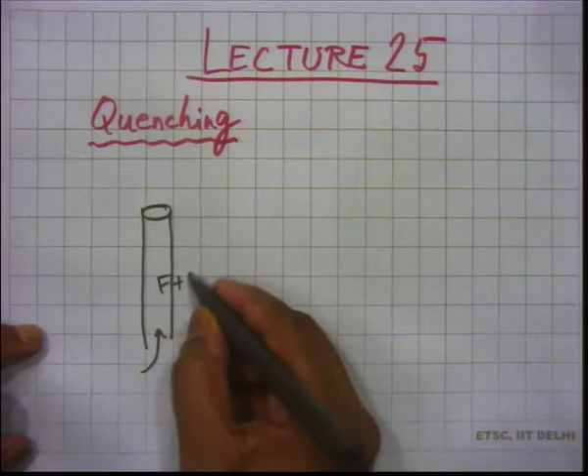Quenching is extinguishment of flames, and the way quenching is studied is you can take a tube, for example, and flow a fuel air mixture through it to get a flame. Then if you suddenly stop the reactant flow rate, you would expect to see the flame come back.

That is called flashback - the flame moving back inside the tube. The reason we can study quenching like this is that if you take tubes of different diameters, for some tubes the flame which flashes back will not be able to propagate all the way down.

It will propagate some distance maybe, but then it would get extinguished. So that is called quenching.

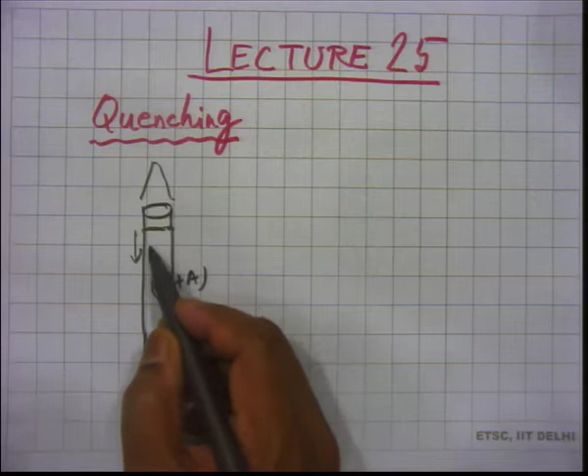Extinguished means the reactions in the flame will become very low and stopped, and you will not see a visual flame. If your tube is transparent, you will see the glow of the flame, the visual flame zone, going off - we have already seen that in one of the videos in a previous lecture.

In that experiment recorded on video, tubes of different diameters were used, a fuel air mixture was flown through the tube, and then the flow was suddenly turned off, and then you see the flame coming back.

In some cases the flame could come back and propagate all the way down. In some other cases the flame did not propagate all the way down. So there was a situation when the flame got extinguished midway, and that we call quenching.

Now, if you remember the video again, you will recollect that in those situations where the tube diameter was small, when the tube was narrow, the flame was not able to propagate all the way down.

So the first thing we seem to understand from that video is that the flame traveling in the tube has the fuel air mixture, because you are flowing it and then suddenly stop it. Even though we stop it, it still has the mixture in it.

It still has the mixture in it, but the mixture is not moving out so much because you have stopped the flow. So you have a tube filled with a fuel air mixture, and the flame has the possibility of moving down.

It was not moving down when the flow was taking place, because in that case the flame was getting its feed of the fuel air mixture, but you suddenly stopped it. Now the flame has this opportunity to travel back.

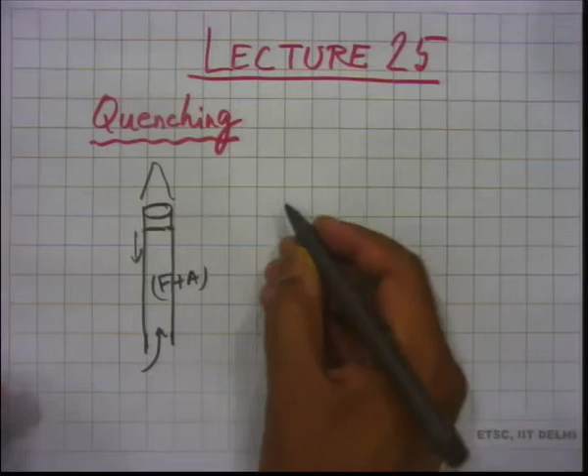Because it is getting more resistance and more in contact with the walls. So the response here is that in a narrower tube there is more contact with the walls, and the way to quantify that is to calculate an area by volume ratio of the flame.

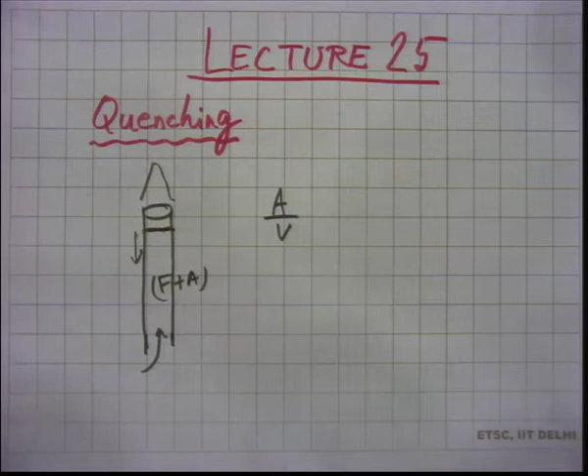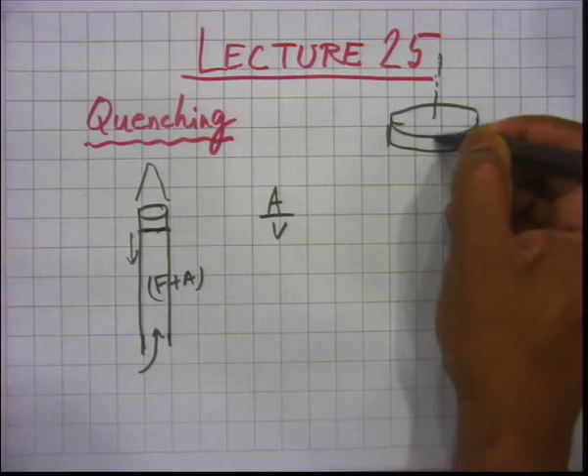So the flame which I have drawn here, if you think about it in more detail, it is like a disc. This is the axis of the tube, so this is the tube, and this is the flame which is trying to propagate. So it is like a disc, we can say, approximately. Nothing is actually like a flat smooth surface in a flame - we remember the videos, it does seem to get distorted, not exactly planar. But we have to simplify things, we cannot take all complications into account, so we take this as a disc.

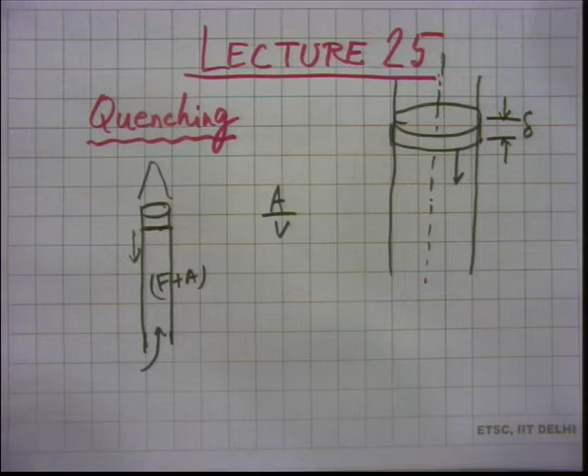Now, you can tell me how much is this - delta. So this is the thickness of the flame. We are using the same notation as we used for laminar burning velocity and flame thickness derivation of expressions. So this is delta, and if we call this tube diameter as d, then the area by volume is what?

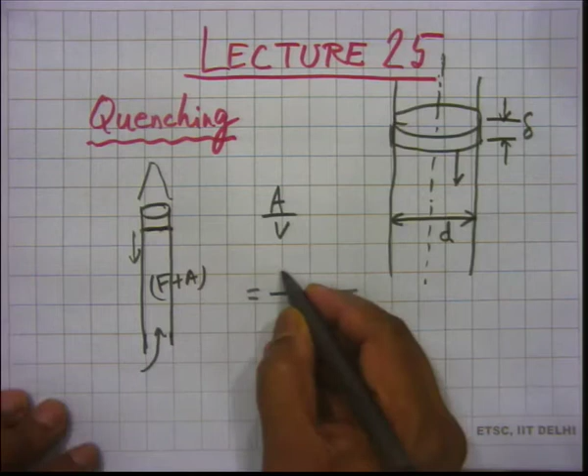Area is pi d into delta. Which area are we talking about? Contact area. So that should be pi d into delta, and the volume should be pi d squared by 4 into delta - volume of the flame. So the deltas get cancelled out, the pi's get cancelled out, one of the d's will disappear. So this will be 4 by d.

So area by volume is actually 4 by d, which tells you something you must have guessed even before we got this expression here - that if you have a smaller diameter tube, then the area by volume ratio, the contact area divided by volume ratio, is actually going up. If it goes up, then the heat losses in a relative sense will be stronger than the heat that is generated in the flame, than the thermal energy released in the flame. In some sense it will be stronger. So that is the whole idea.

So in that context we can understand something about quenching, but we want to go further and also derive an expression for what is known as a quenching distance. The d that I have marked here, this can be called a quenching distance - for a tube, it is that diameter of the tube below which a flame will not be able to propagate. More than that, the flame will be able to propagate. So that is called a quenching distance.

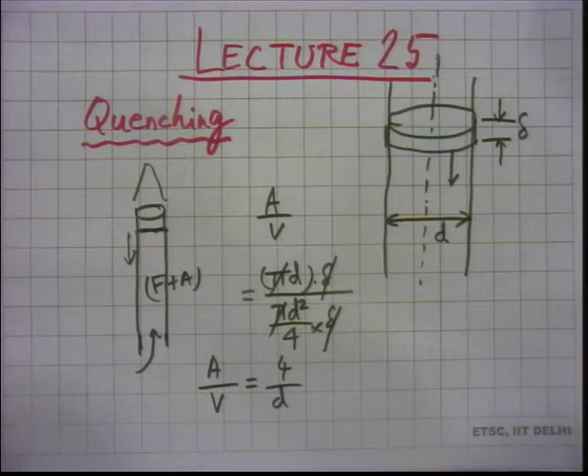So there are quenching distances for tubes, but there are also quenching distances for slots. Suppose you have a slot kind of burner, that means a rectangular cross section, maybe with a high aspect ratio, and through that there is a mixture flowing, and then you have a flame established on the top of that slot. You stop the flow of the fuel air mixture - suddenly will the flame come back, or will it get quenched? So it is a similar question.

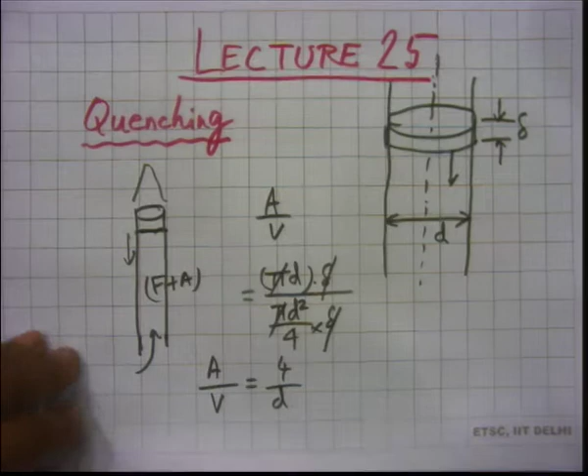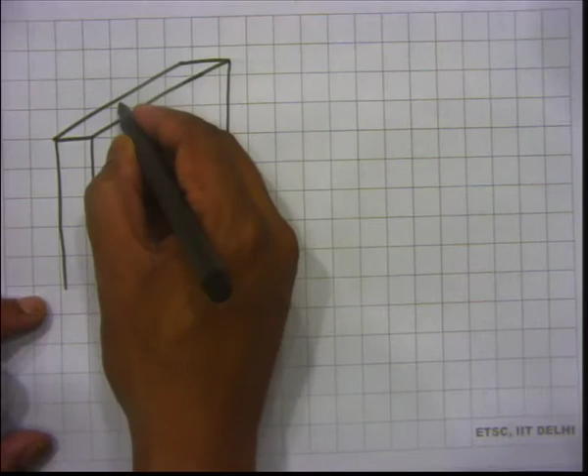Similar to the circular tube situation, but you have this other situation when you have a rectangular slot, and if you have this, then this distance is d, and this is called a quenching distance. So typically we call a quenching distance even for a tube, even though it is actually that diameter. So here we call it the quenching distance.

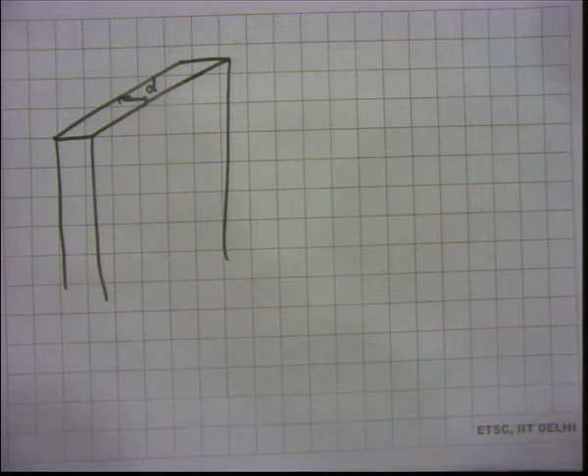The same thing applies here. If you have a slot burner where this width, this distance d, is smaller, then the flame is likely to get extinguished. You can think of a flame and calculate an area by volume ratio, and it's easy to see that if this distance is smaller, the area by volume ratio is larger.

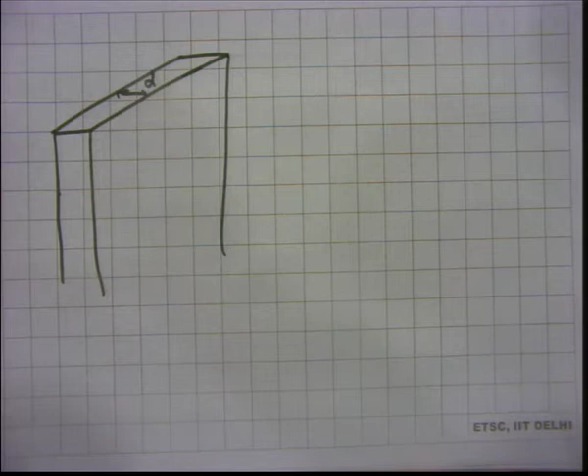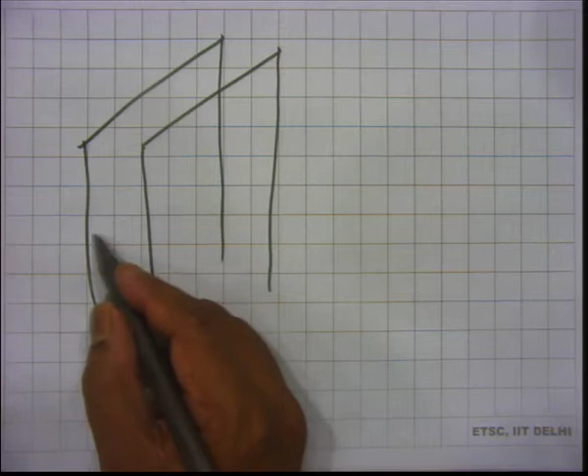Now, we will not even do this slot burner, we will just do a derivation where we have two plates like this. It is open on one side, open on this side, and open on the back side, and it is just two plates, long plates. If they are long, then they can contain a mixture.

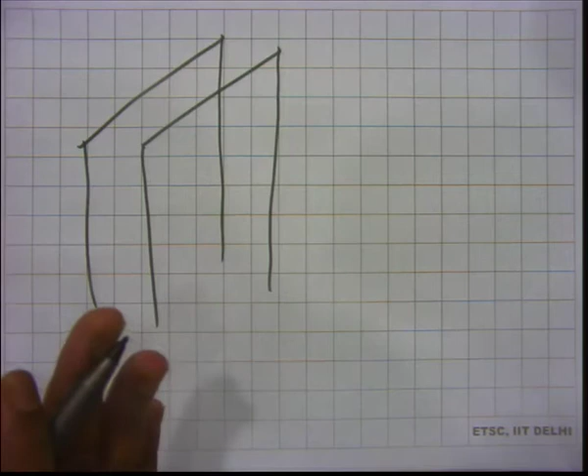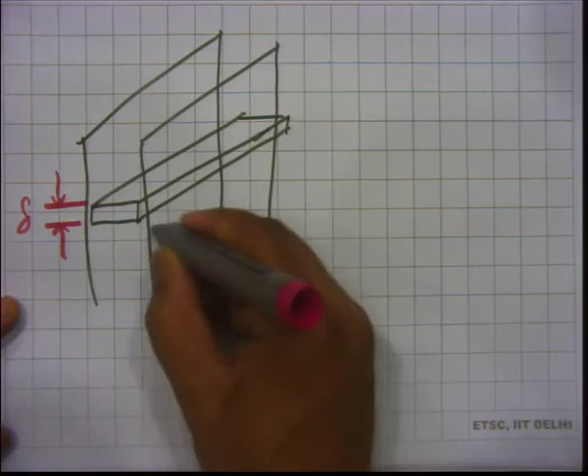So you have this flame here which I am drawing like this, and this again will be delta. We will call this L, and we will call this D. D is the spacing between the two large plates.

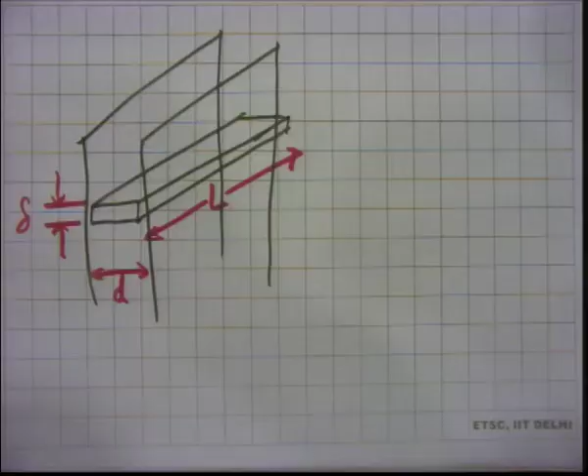The objective of the analysis we are going to do is to get an expression for D in terms of something else, in terms of the properties of the mixture. D is this spacing between the plates where it gets extinguished. We want to determine the limiting value of D for which quenching happens for the first time.

What do I mean by first time? Imagine having these two plates, and to start with you consider a configuration where the plates are far apart, with a fuel air mixture between them. If you ignite, you expect the flame to go through because the distance appears large, and then you reduce it, and keep reducing it. At one point it will not be able to propagate, that is when we call it a quenching distance. Smaller than that it will of course quench the flame.

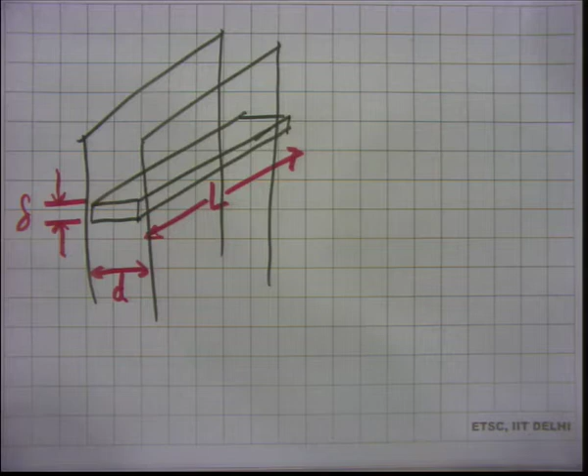So here we are not going to stop the flow. In this example we are just thinking of a situation where you have these two plates and between them a fuel air mixture. It is similar to a situation where you have these two plates, a flow going through them, and then you suddenly stop the flow. So then you have a fuel air mixture which is not flowing and the flame is propagating. We are thinking of that situation.

As we are decreasing the distance, at different distances we are also stopping that flow and then finding out what happens. These are all different experiments. First experiment: large distance, fuel air mixture between the two plates, not flowing. How do you imagine a fuel air mixture not flowing? You first think there was a fuel air mixture that was flowing, then you stop the flow, and now the flame starts coming back and your observation time starts from there.

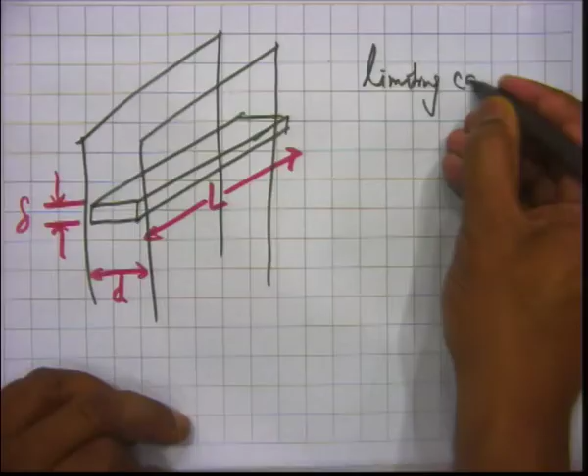Second experiment: you reduce the distance between the plates by some amount and do the same experiment. Third experiment: reduce the distance again by another amount and repeat. We keep doing that until the flame gets quenched. Once you get quenching, further experiments with smaller distances will also result in quenching. So we are talking about a limiting case, and we want to do an analysis.

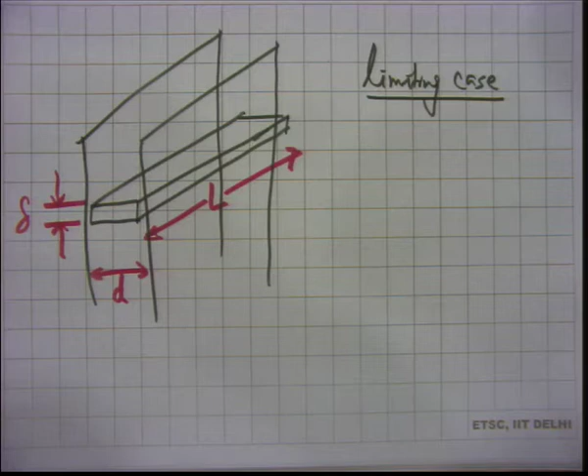The question that was asked was, what is the purpose of this objective? We want to get this D, the limiting value of D, which is the quenching distance, in terms of a few things, in terms of the mixture properties or laminar burning velocity or something.

If you have two plates and a fuel air mixture, then D cannot be just one number, one universal value for all kinds of fuel air mixtures. That's not possible. Even for a given fuel, the equivalence ratio of that fuel air mixture matters. Suppose you are considering only propane, the propane air mixture equivalence ratio will determine the value of D, isn't it?

A stoichiometric mixture will have some value of quenching distance. If it is not stoichiometric, it will have some other value of quenching distance. If you change the fuel, then the quenching distance will also change.

So D depends on a few things, right? D depends on the fuel type, depends on the equivalence ratio, maybe some other properties of the mixture, which we'll have to see. So we want to get an expression for this.

Now, the analysis that we are going to do is for this limiting case, when you get quenching for the first time. But the analysis will be good in the sense that it will tell us something about D, what mixture properties D will depend on. It's a simple analysis because we are just looking at a situation where the limiting condition has been met. The limiting condition must be that the heat generation and the heat loss are becoming equal. So there is this thing going on for the flame.

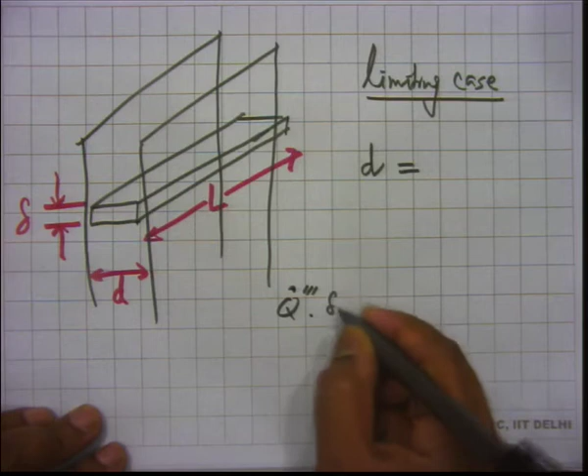Now that should be equal to the heat loss. So heat loss will be thermal conductivity K multiplied by area. How much will be the area?

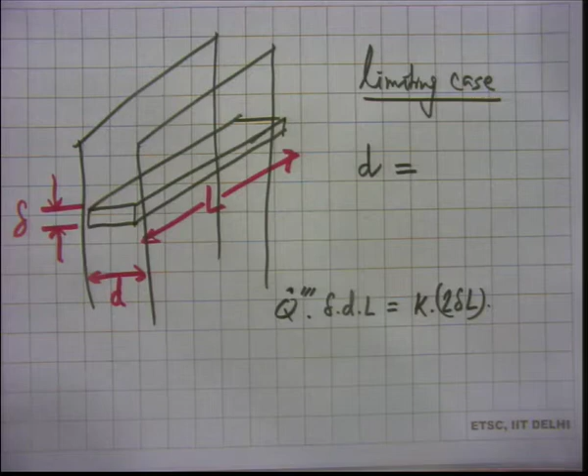These are two large plates. So, 2 delta L, multiplied by... there has to be a temperature gradient at the wall. Now, the temperature gradient at the wall is a little tricky. So, let us see, do I have space here? Okay, I will try to use this space here.

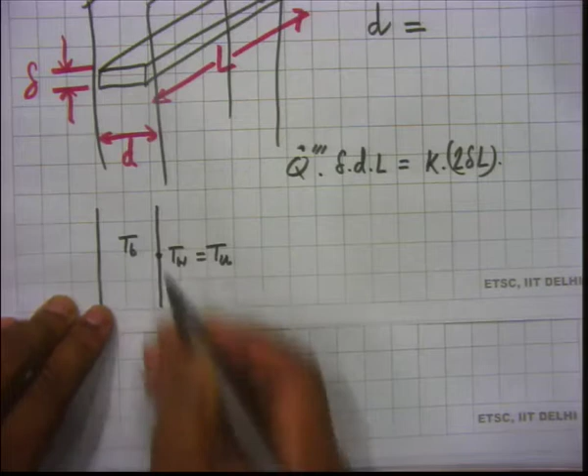Let's think about these two plates, and we have a flame in this region, and at the wall the temperature, let us say the temperature is Tw, and we approximate this as Tu, the unburnt temperature. So, if you are doing the experiment at room conditions, this temperature is probably 300 Kelvin. So, we are saying that the wall is at 300 Kelvin. Not exactly correct, maybe slightly higher than that, because the flame is in touch with it, but let us say it is Tu, and here this is flame temperature Tb, burnt gas temperature.

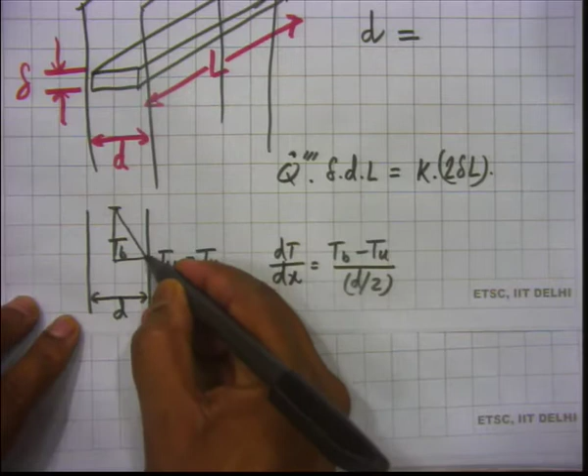So, as a first approximation, you can write the dT dx at the wall to be Tb minus Tu divided by d by 2. This distance is d. But that is like assuming a linear temperature profile, that is like saying that this temperature here is some Tb and this is Tu. So, you just draw a straight line, then you calculate Tb minus Tu divided by d by 2.

K is for the gas, K is not for the wall. K is for the gas. Now, in case of gas, there is convection. But here we are actually talking about, primarily, heat loss through conduction, and also this is like a stagnant mixture. Remember how we talked about this mixture, that you have this fuel-air mixture which is flowing, and then you have the flame on the top between the two plates, and then you stop the flow. So, it is essentially a stagnant mixture, but the flow has actually been stopped. So, the primary effect is actually conduction through the wall.

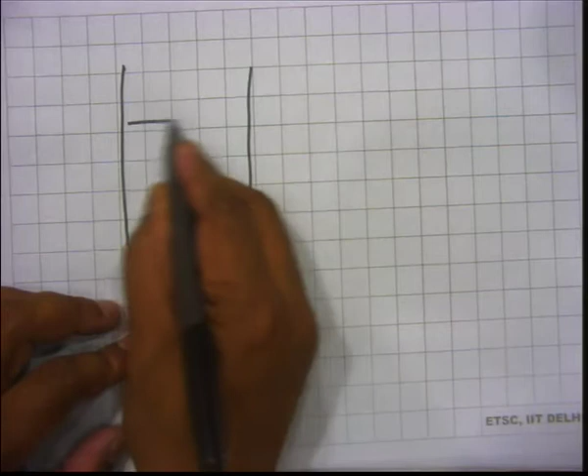Now, convection can also be an issue. The other point is that we cannot say that the temperature profile will linearly go down like this, because all through this region the flame exists. So, all through this region we expect the temperature to be high, isn't it? So, drawing it again, you expect temperature to be actually close to Tb and then suddenly drop near the wall, right.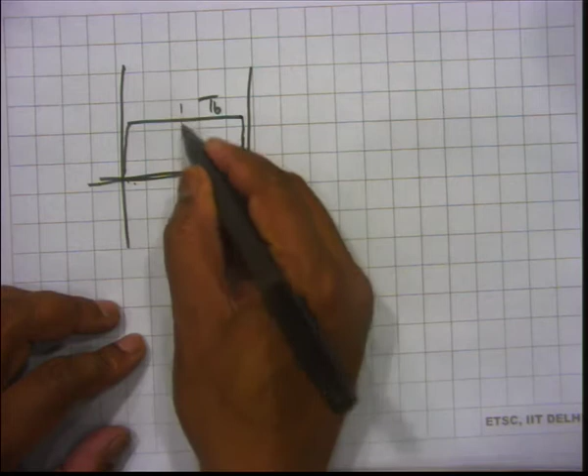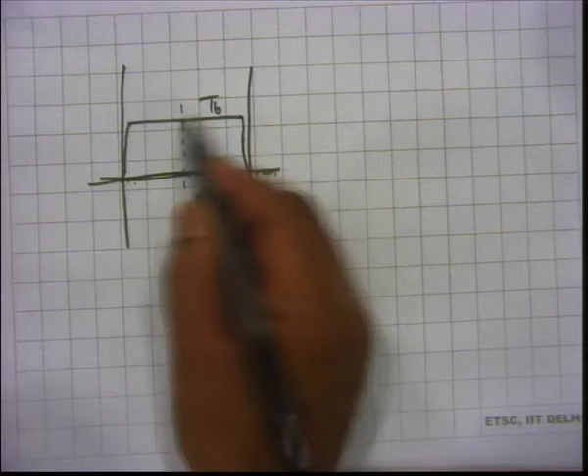If the flame is around here, then somewhere in the middle of the spacing, at the midpoint of the spacing, temperature will definitely be Tb. But if you say that it goes from Tb to Tu just like this, that will not be correct, right, because all through this region you have the flame. So, that will have a high temperature, close to Tb, and only very near the wall will the temperature start coming down.

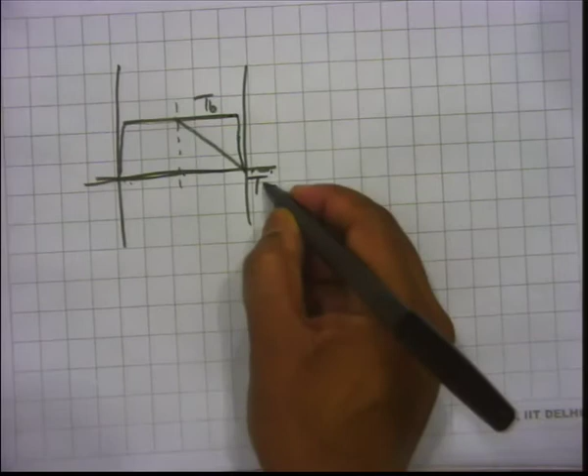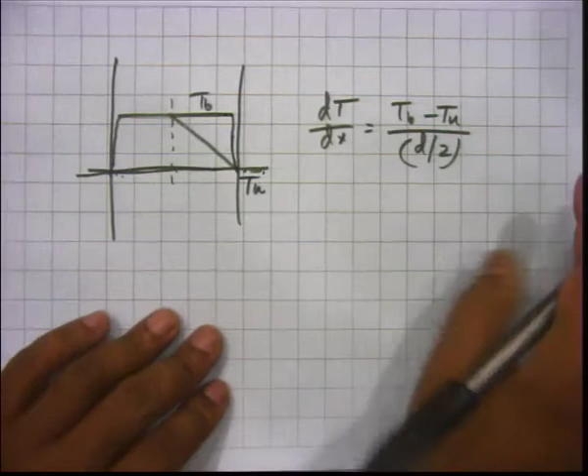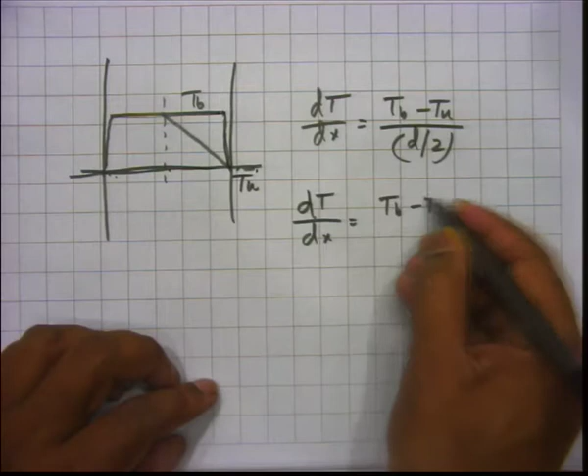Okay, so this is Tu. So, if you say dT dx is actually Tb minus Tu divided by d by 2, that is not correct, that is like a linear assumption. If you see, this is more realistic, and if this is more realistic, we will expect the dT dx at the wall to be much higher than this expression tells you. So, to take care of that, we will take dT dx to be Tb minus Tu divided by d by b, where b is greater than 2.

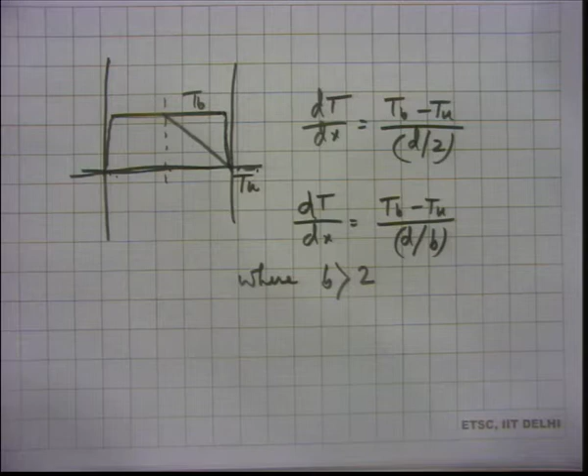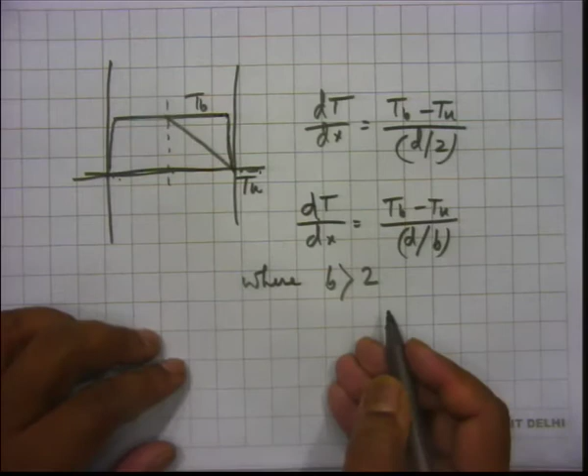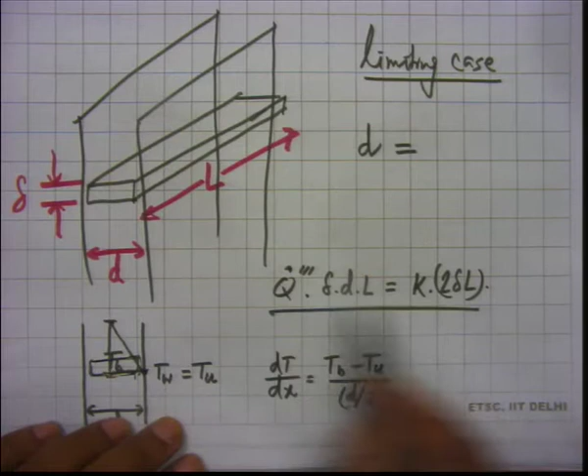Okay. So, using this, going back to the equation that we had a few minutes back, we had this equation, and the heat generation rate per unit volume can be written as minus m dot f triple prime bar into delta Hc.

We know that from the analysis that we were doing for a premix flame, a planar premix flame, when we tried to derive the expression for SL, laminar burning velocity, minus m dot f triple prime bar dot delta Hc, that is your q dot triple prime. Okay, so why do we have the minus sign again?

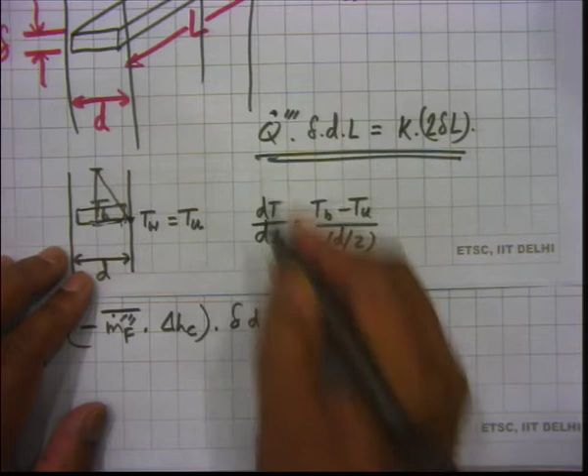So, the delta Hc, now we have del d, we are going to be looking at this delta dL equal to... so this is the magnitude of dT dx that we want to use here. So, the magnitude, so we write k into 2 delta L, and the magnitude of dT dx we write as Tb minus Tu divided by d by b. Okay.

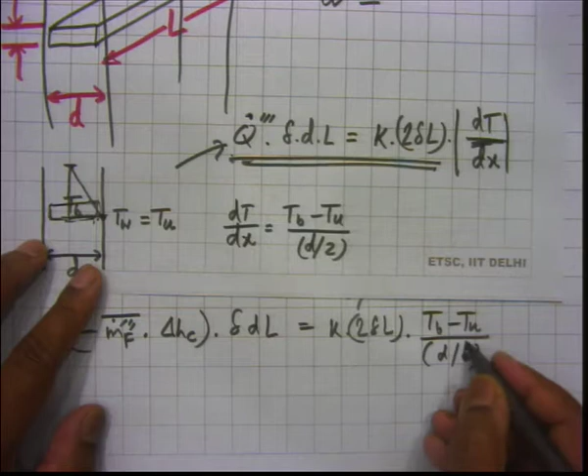What is the reference of x here, sir, from this direction to this direction? Actually that does not matter, we are taking the magnitude of dt dx.

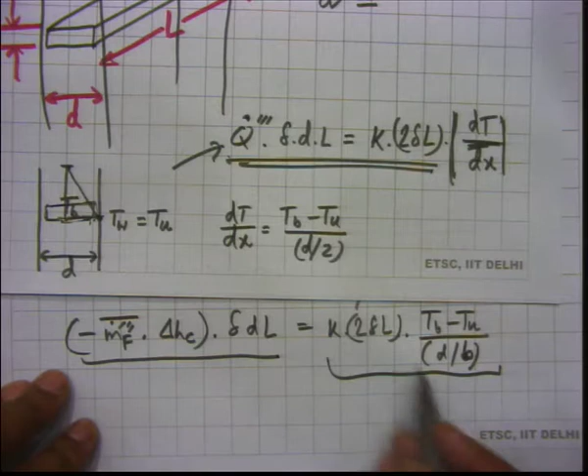So Tb minus Tu divided by d by b is what we are using as the temperature gradient. This is what we are trying to make sure is a positive quantity. The left hand side is a positive quantity, so this also has to be a positive quantity.

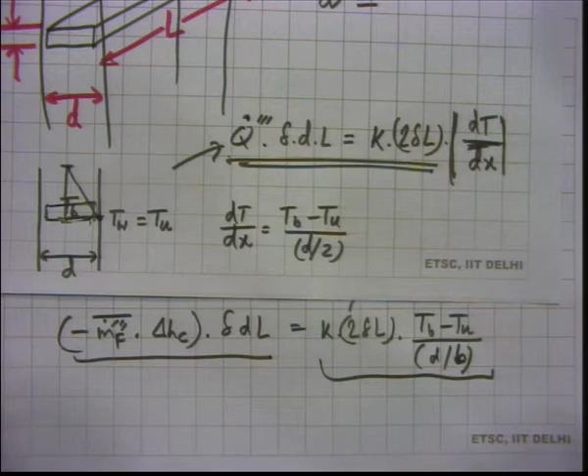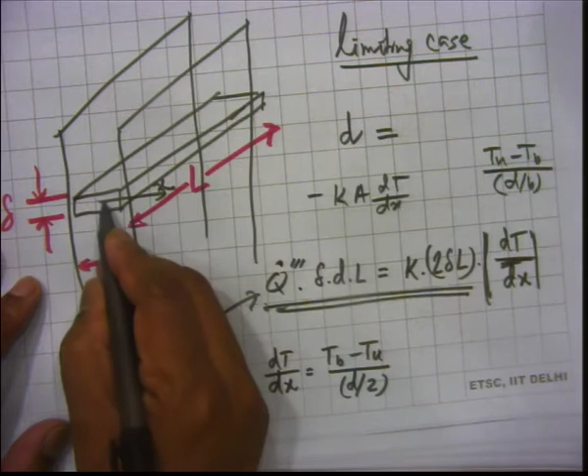So if you had the x going into the wall, then it is actually minus Ka dt dx. If your x is like this, then the heat loss is minus Ka dt dx, and the dt dx is actually Tu minus Tb divided by d by b, because Tu is downstream, Tb is...

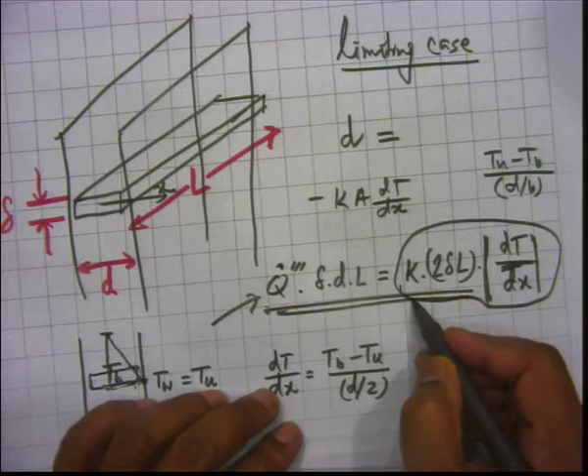But we actually just need the magnitude of the heat loss. So we write k into 2 delta L into magnitude of dt dx. The magnitude of dt dx we are using as Tb minus Tu divided by d by b, b is greater than 2, to take care of the fact that it is actually not a linear temperature variation from the middle of the spacing to the wall. So if you do all this, this is the expression we are getting.

This is a limiting situation, representing when heat generation equals heat loss. This is also known as Williams criterion. Williams gave this criterion, and it is also listed in Turns's book as Williams criterion for this quenching situation.

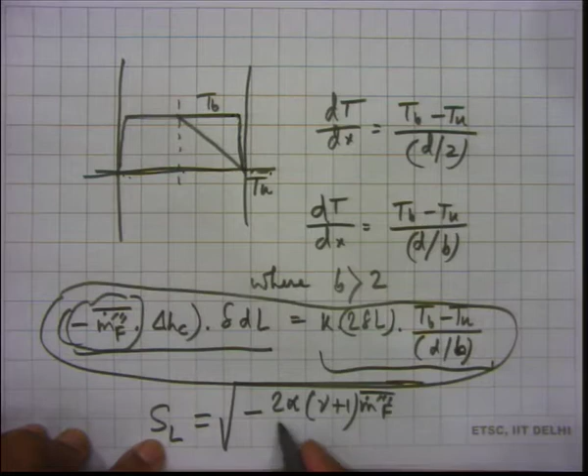With the help of this, we can cancel a few things. Plus minus m dot f triple prime bar can be written in terms of SL, because we have SL equal to square root of minus 2 alpha nu plus 1 m dot f triple prime bar divided by rho u. So we had all that.

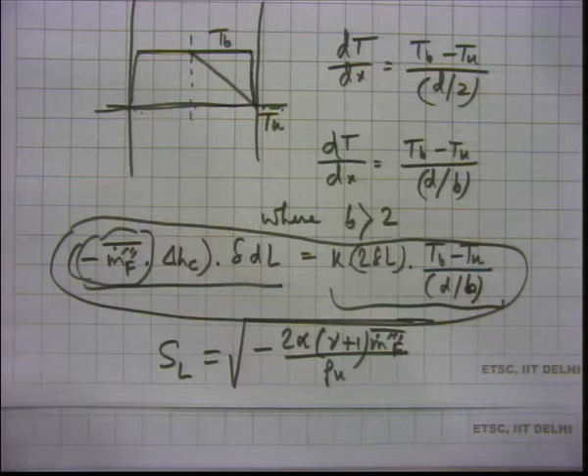If you look at this, then what we will do - and I will not do the steps here as such - using this one we can get m dot f triple prime bar in terms of SL. So that can be used here, and for delta Hc, some time back we derived this.

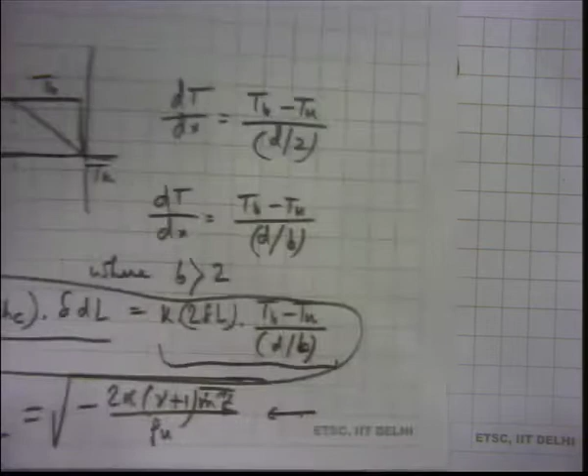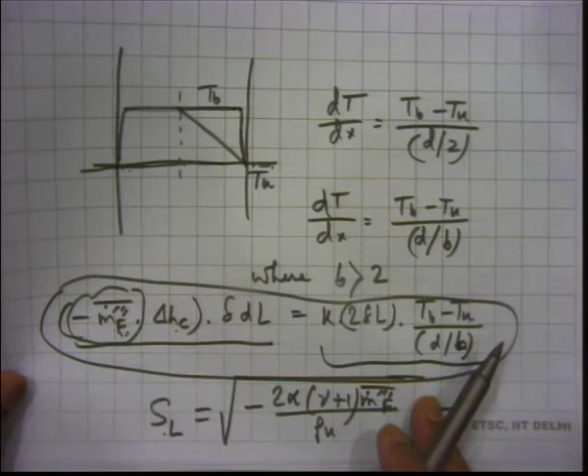So the m dot f triple prime bar will now be written in terms of SL, delta Hc will be nu plus 1 Cp Tb minus Tu, and then you have these other things. Based on all that, you will be able to write d, and d can be shown to be equal to square root of b into delta, with a little bit of work which I think you can take care of.

So this delta Hc will be for adiabatic flame? Yeah, that is correct. So this is also an approximation - the delta Hc expression that we wrote is actually derived for an adiabatic situation.

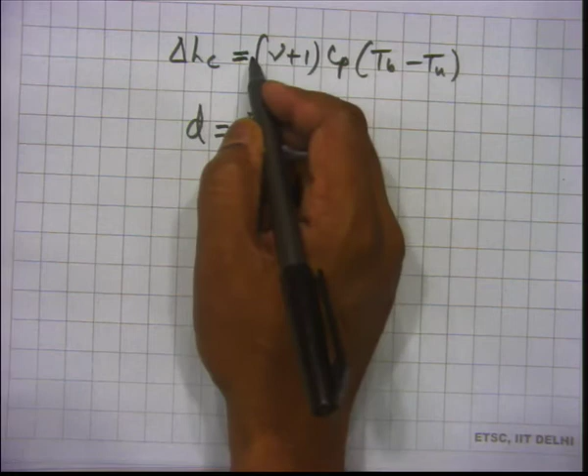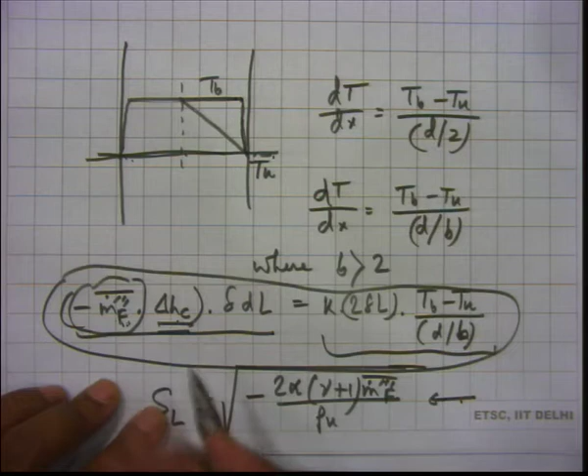His point is that the delta Hc expression we are writing as nu plus 1 Cp Tb minus Tu, that we derived for an adiabatic sort of situation - but this is not adiabatic, though as an approximation we are using this.

If we use this, and also use the SL expression - SL expression is also for adiabatic situation, right? Overall SL is actually for adiabatic situation, correct? So it's not just delta Hc. We are using these things even though there is heat loss taking place from the flame.

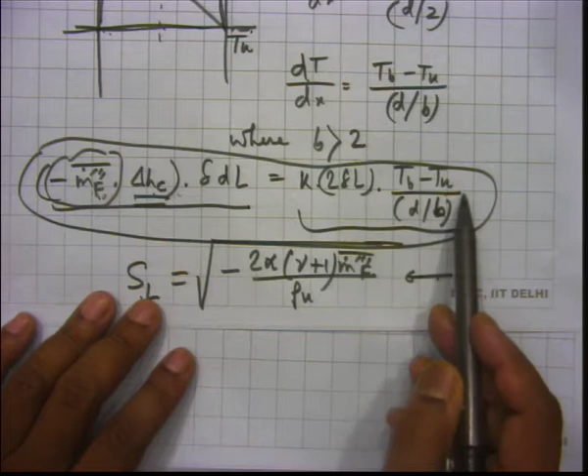So as a first approximation, we'll be able to get d equal to square root of b into delta after you do this algebra. Few things will get cancelled - delta Hc as Tb minus Tu, and in the previous expression we want to simplify, that also has Tb minus Tu. So the Tb minus Tu's will get cancelled, and few things will happen like that, and you will be able to show that d equal to square root of b into delta.

Now, is this useful? Not very useful, because you can't really calculate the quenching distance, since you don't know b. All that you know about b is that it is greater than 2, maybe much more than 2. But you don't know the exact value of b, because that you can get only if you have detailed measurements of temperature in the flame zone.

Then you will know how temperature from the center of the channel goes towards the wall where it comes to Tu. So you don't have that information. Neither do you have a more detailed theory which tells you how temperature will vary near the wall. You don't have that.

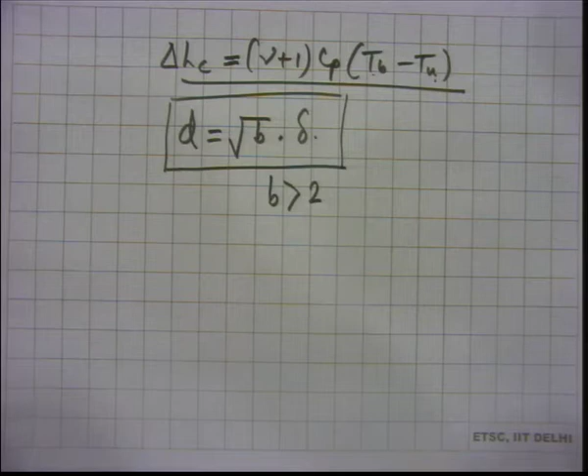All we know is b is greater than 2 and d equals square root of b into delta. So if this isn't very useful, why did we do it? We did this because it at least tells you that d is linearly proportional to the flame thickness, and it also tells you that d is significantly greater than delta, because even if you take b equal to 2, it's like 1.4 times delta, but it's actually more than that. So it has limited utility, but it does give us something.

If you look up different combustion texts, like Turns's book or others, you'll see values of quenching distance. Quenching distance is an important thing to know. For example, quenching distance for acetylene stoichiometric mixture at ambient conditions is 2.3 mm. For methane it is 2.5 mm. For propane it's about 2 mm, and for hydrogen it is 0.64 mm.

So we are talking about stoichiometric mixture of hydrogen and air at ambient conditions. The quenching distance is 0.64 mm, whereas for methane it is 2.5 mm.

Can we actually interpret this from d equal to square root of b into delta? Does it help us interpret the values we got? You don't have to remember the values as of now, you can always look these up from the book. But what I'm saying is methane has 2.5 mm, whereas hydrogen has 0.64 mm, significantly less for hydrogen. So why is it so much smaller for hydrogen? Can that come out from d equal to square root of b into delta?

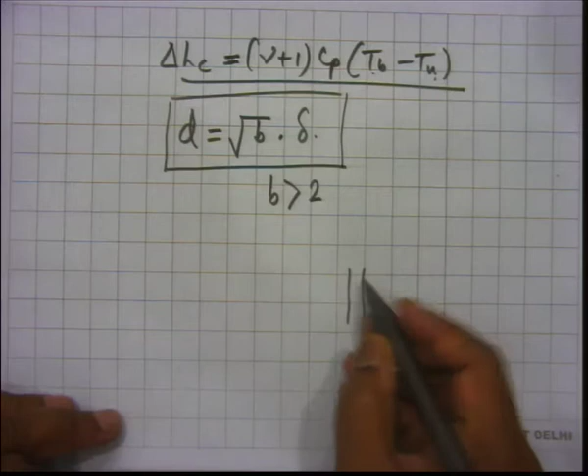For example, if you have a burner somewhere, any kind of burner, not necessarily a tube burner, then probably somewhere upstream you have a mixer.

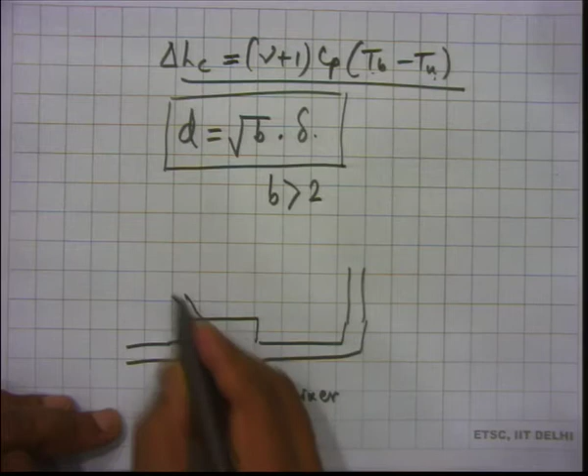So this is a mixer. You are supplying fuel there, and you are also supplying air. The fuel and air mix here, then the fuel air mixture comes out of this, and it burns on the top of the burner.

Okay, so you got some flame, right? In case the flow rate is stopped or there's some disturbance, something gets choked, then the flame can travel back, right? We know that. We have some understanding now.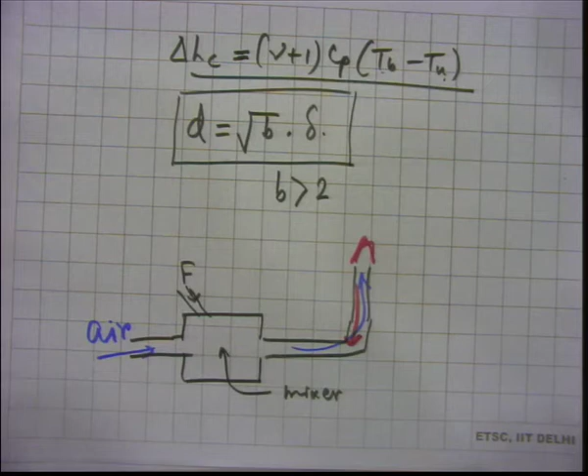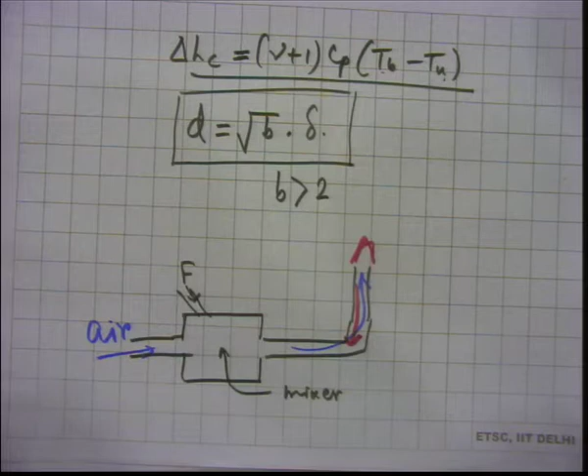We don't fully understand, but we understand that when there is a flow, you can probably keep it stabilized on the top of the burner. When the flow stops, the flame can travel back, because the flame has its food here, all this region. So it will tend to consume that. You may not like it traveling back, but it still has a natural tendency to do so.

And if it goes to the mixer, then it's got a large volume of fuel air mixture which it can ignite, and that can be problematic. If it suddenly travels and reacts very strongly in a chamber which has mixing, with fuel and air mixture both coming in, that can be problematic. That can lead to accidents.

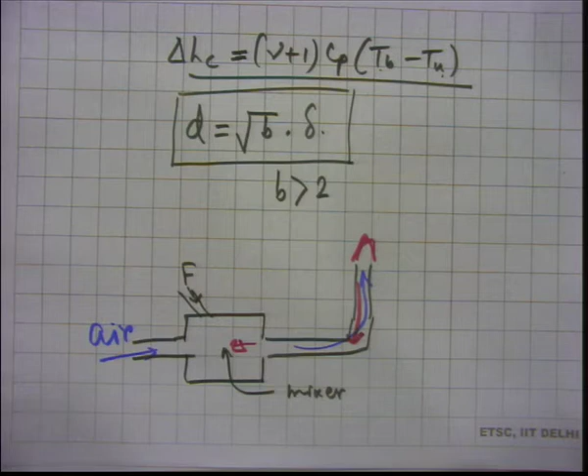So there are actually flame arresters available in the market. Flame arresters will typically have some kind of a matrix with holes. I've just shown 5 here, but it will have hundreds. It's a matrix with a large number of holes, and those holes will be tiny, and that sort of a flame arrestor you may place here.

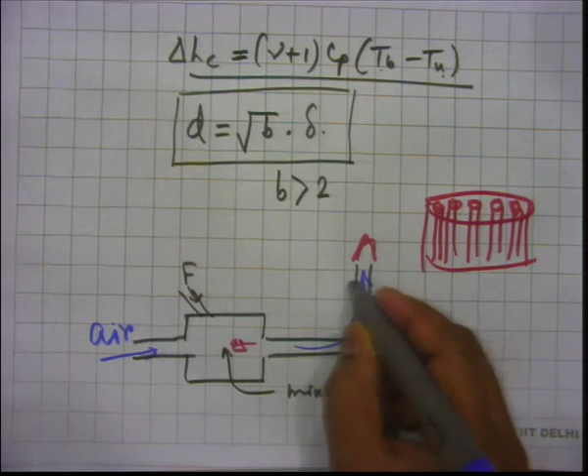So if the flame tries to travel back, it will get quenched. Why will the flame get quenched? Because it's no longer getting the full passageway. It is forced to travel back through a large number of narrow passages created in that flame arrester. So the flame will get extinguished.

So this is commercially available. And if we are doing a lab experiment, sometimes in IIT we don't buy these flame arresters, we can make our own flame arresters also. If you have wire meshes, and keep let's say 3 or 4, maybe even 5 or 6 wire meshes of appropriate mesh size.

If you keep one on top of the other, typically the open spaces of one will not match with the open spaces of the other, so it will give a complicated flow path. That will make it even more difficult for the flame to propagate, and you will get quenching. So this we can make as a homemade flame arrestor, which uses the idea of quenching.

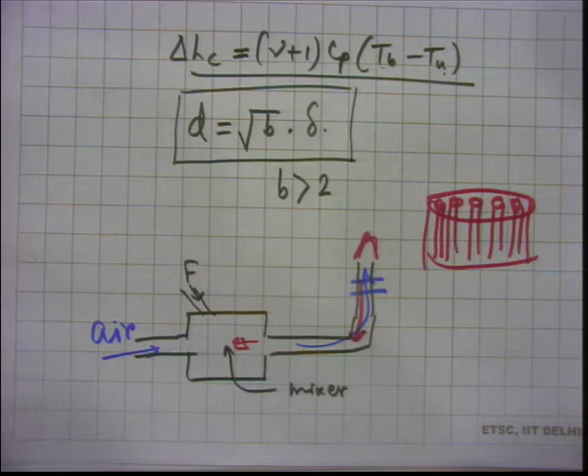And since we know that d equal to square root of b into delta, can we also say something about the quenching distance for a given fuel? We just compared quenching distances of different fuels, but if you have, let's say, a methane air mixture, and you vary the equivalence ratio, in which case do you think quenching will be more difficult?

Yes, the stoichiometric mixture will tend to have larger burning velocity, close to stoichiometric is larger burning velocity. In the last class we discussed this, right? Laminar burning velocity depends a lot on the mixture that you have, on the equivalence ratio, and the equivalence ratio near stoichiometric gives you high adiabatic flame temperature, and high flame temperature typically leads to high burning velocities.

So if you have a stoichiometric mixture, SL is high, delta is smaller, and if delta is smaller, then the quenching distance will be smaller. So if you know you are dealing with a stoichiometric mixture, your flame arrestor needs to have smaller holes, right?

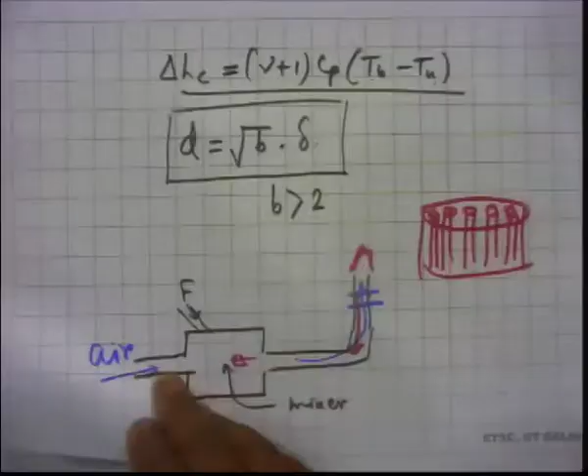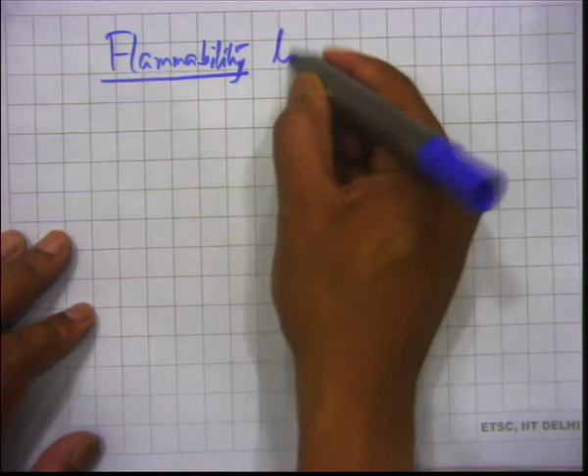Okay, so this is about quenching. Now we spent a lot of time on this, but we want to spend a few minutes now on another concept, which is flammability. Again, this is something which even before doing the combustion course you kind of know of. So you know that if you have a fuel air mixture, there are flammability limits.

I think all of you have studied internal combustion engines in the undergraduate, and you must have come across concepts like flammability limits. So if you have a fuel air mixture, the mixture is quote unquote flammable for some mixture ratios. If the mixture is too lean, it's not flammable, and if it's too rich, it's also not flammable. So there is a rich flammability limit, there is a lean flammability limit, or in other words, an upper flammability limit and a lower flammability limit. So these things exist.

So if the mixture is not flammable and you are trying to run an engine with that, or trying to burn that fuel air mixture on a burner for heating or some other application, then it will not work out. So the mixture has to be flammable if you're using it for combustion purposes.

Now I said that if the mixture is too lean, then it's not flammable, so we call it the lean flammability limit. But then what is flammability? How do we determine flammability? That should be the question, that should be an objective.

In this case, we will not be able to do an analysis. Like for quenching, we did a simple analysis and we got d equal to square root of b into delta. For flammability, we will not be able to do something like that. But I can tell you about how experimentally flammability is determined. So we'll start with that.

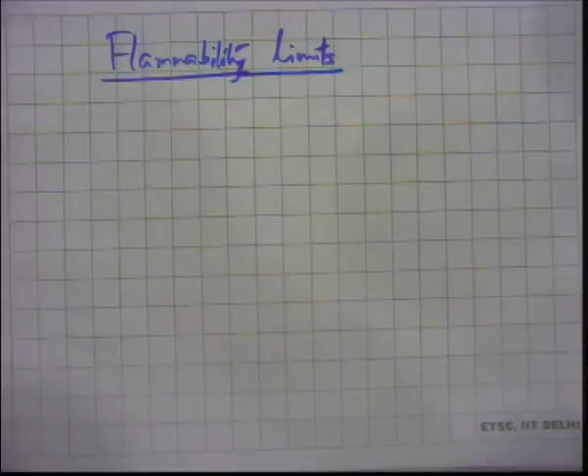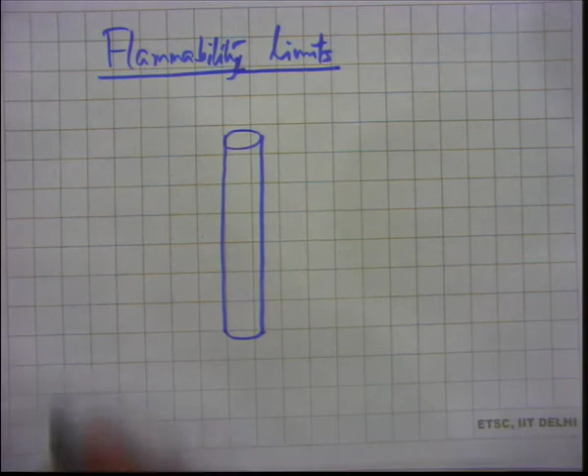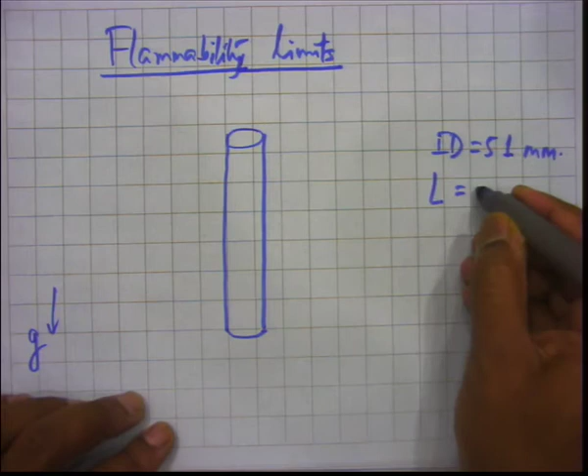So what is done is people take a glass tube which is mounted vertically. This is vertically mounted, and it's a glass tube so that you can see it has a fuel air mixture, and this is a standard flammability setup where the internal diameter is 51 mm and the length is 1.5 meters.

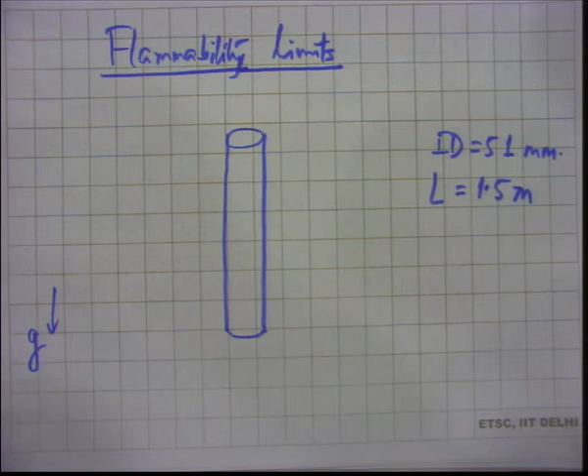So it's filled with a fuel air mixture. In a standard experimental setup, it's closed at the upper end, and this side is open, and it's ignited at the lower end, that is at the open end. Then what is flammability? You would like to see whether it actually propagates all the way up. If it propagates all the way up, then it is a flammable mixture. So this is a simple setup.

So we are not discussing an analysis of flammability limit, we are not writing equations, we are not getting expressions for equivalence ratio for which it will get extinguished. That is too hard to do in the first course, but I just told you about how this experiment is done. This is a standard flammability setup.

How are you sending air fuel mixture here? It is filled up with a fuel air mixture, so you can fill it up and maybe then open the bottom. This appears simple, like there's nothing in it. Transparent tube, fuel air mixture, ignite, just see whether it propagates or not, then it is flammable, otherwise it is not flammable.

Okay, but where is the science? Does it have any science? Why is the internal diameter 51 mm? You can ask that. Has it come through some research?

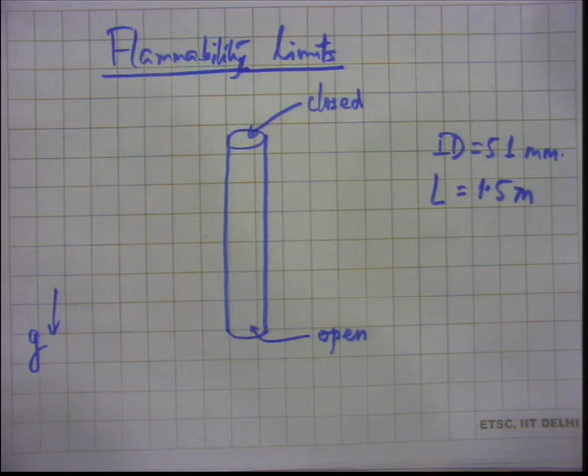For rich mixture, you can go up to 1.64 for methane. And for hydrogen, the lean limit is 0.14 — at 0.14 hydrogen air mixture is still flammable. And on the rich side, 2.54 is the highest value of equivalence ratio of hydrogen air mixture in ambient conditions where the mixture is flammable. So you see that hydrogen has much wider flammability limits, again for the same reason, that basically it is a strong fuel in the sense that it is highly reactive, it has a high value of diffusivity, so it can propagate easily and things like that.

Now, what are the effects of various things on flammability if you increase the temperature of the mixture? The values that I gave you are just for ambient conditions. If you increase the fuel air mixture temperature, then you expect that the flammability will increase, isn't it, because the reaction will be easier. So with temperature it usually helps and the flammability range will get widened. And pressure has much less effect. For the lean side, actually it does not have much effect at all. For the rich side, there is some effect.

For the rich side, the upper limit gets enhanced, the lower limit does not get enhanced — the lower limit does not get affected much with pressure. We can't do much more analysis of flammability, but this is based on experiments. In the next class we will talk about ignition. We discussed quenching, and there will be some similarity in the opposite sense. When we talk about ignition, as I said, again it is transient, and again we will use a limiting sort of analysis.